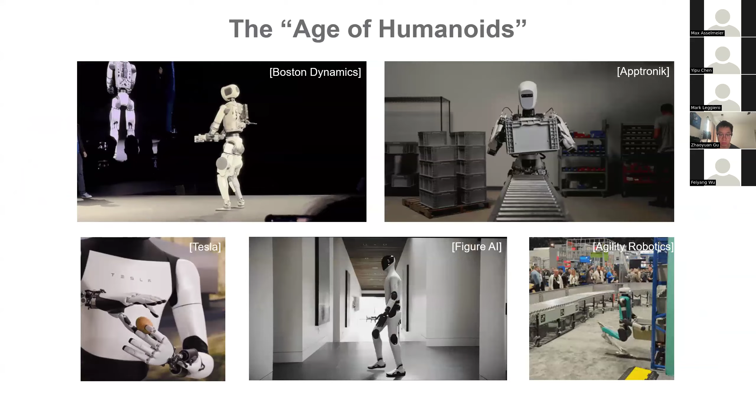So it's driving the industry to consider more automated options, such as humanoid robots in general. Many people now call it the day or the age of humanoids, not only because of the hype, but also because the hardware and embodied intelligence is converging to a point where humanoid may just make sense. It's always been like the final fantasy for human beings, to create autonomous robots that's similarly shaped and can do similar stuff that we do. But I don't believe the technology is really here yet. I still think humanoid robotics in general has a long way to go, both in the research arena and in exploring the true market where it belongs.

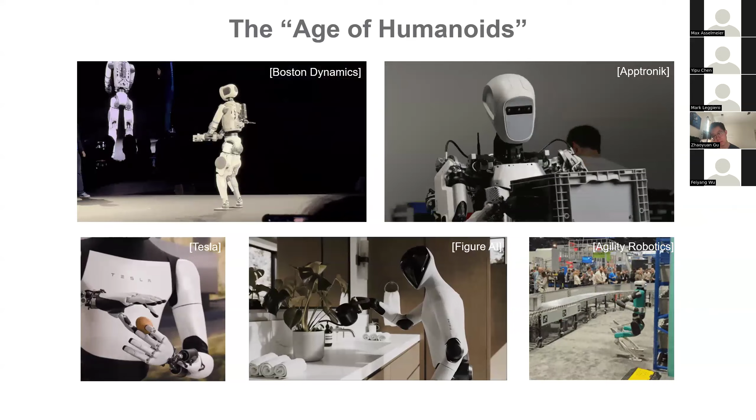So I'll skip some of these motivations and the long videos of fancy humanoid stuff. I believe you guys here have watched them a couple of times already. So the current stage of challenges I believe we face in humanoid robotic intelligence in general - we see from the big companies and research institutes, it's converging to a point where each entity is pursuing their own humanoid-like foundation models, either for general behaviors, for decision makings, or just for low level controls. Upon examination, we can see these structures are sharing similar stuff here.

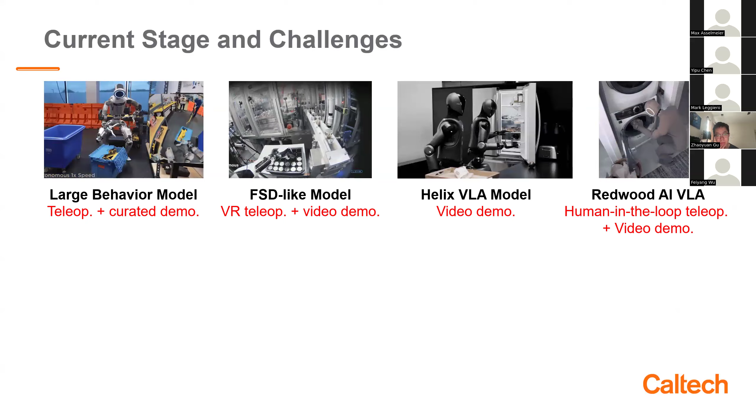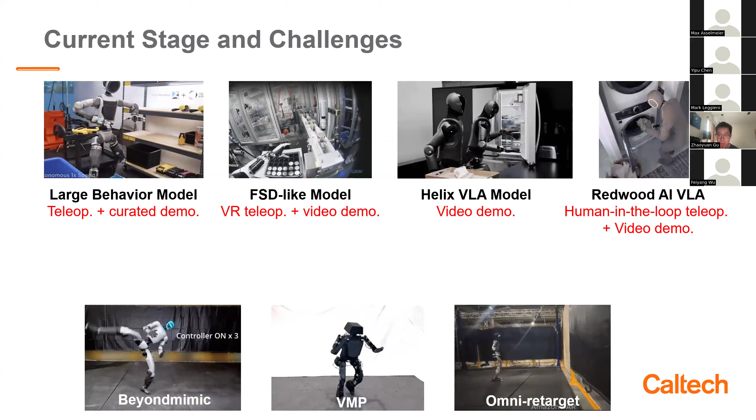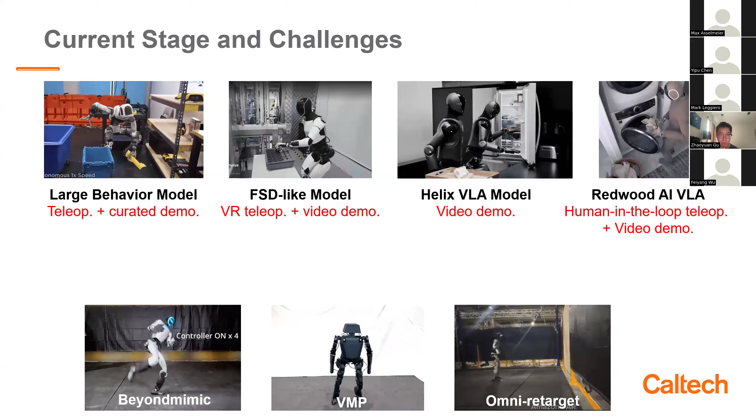So they're all training these models based on some human interventions, either from teleoperations or from human-in-the-loop control. If we look at the research arena as well, some of these research works recently also exhibit similar trends or behaviors, particularly in the motion tracking and learning side, where humanoid is learning human motions - which is funny, because years ago humans danced like robots, now robots dance like humans. Now we see this field converging heavily into demonstration and human data collection. Though very promising as of now, I think it poses some potential challenges down the road that we may not see right away. I hope this does not upset any of you, because I think many of you come from a similar background as I am, and hopefully it's safe to talk about this here.

This is a famous example of the Tesla bot foundation model that is similar to the FSD kind of learning pipeline. On the flip side, the FSD was actually trained based on 10 years or more of driving data collection, over 30 petabytes of real world recording of video data of human expert driving.

Now, if we scale this to humanoid robots, it becomes very difficult because there's no deployment of humanoids yet, and hence no real world working data from the factories. Conversely, humanoids need good foundation models or good controllers to perform tasks autonomously. So it becomes kind of like a chicken and egg problem. This forces us to use video demonstrations, retargeting, or even teleoperation to get high quality data with human interventions in the loop. In many cases these are expensive, resource constrained, inefficient, and prone to errors.

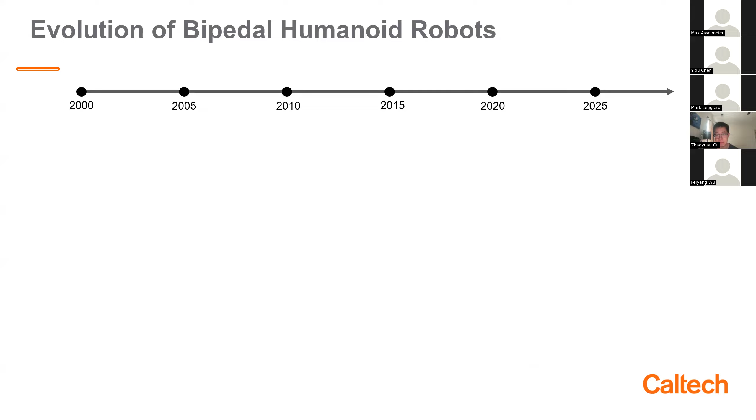If we take a look at the evolution of motion control techniques for humanoids, starting from classic models like LIP, ZMP, through more explicit methods like HZD and more intricate formal modeling strategies like inverse dynamics, operational space control, and then to more recent optimization-based control strategies like whole body control or variants of MPC or hierarchical optimizations, we see steady progress along the way, with each method somewhat built upon the previous one.

So it's kind of nice because everything is connected until we hit the learning arena, namely these motion tracking RL, end-to-end RL. We see there's a little bit of a disconnection from the previous methods we already know. One may argue that policy optimization is just a different scale of numerical optimization, but still it uses methods that are somewhat new, at least to the control side of people.

So we've seen some tries of combining these two arenas together, namely learning augmented MPC, which I believe is a hot topic, and I believe the Ames group is also experiencing some of this right now. My goal here is to try to combine these big circles with all the knowledge we already know, or at least starting from something simple, and use that as a guide to the learning - what we call the model guided learning framework. That's the big picture of how we want to approach this: not completely leveraging learning, but using physics and model guidance in the learning process.

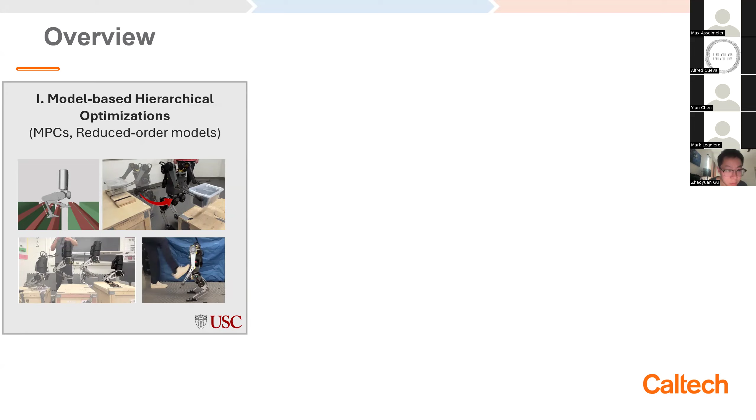And the second section will be my first tries to integrate learning aspects into optimizations, namely using supervised learning in MPC. And the last section will be leveraging these analytical model-based methods during the training of RLs to robustify and diversify the motions and capabilities of humanoids.

Okay, so the first section specifically will focus more on the MPCs and reduced order modeling and how they fit in the whole humanoid control.

Well, this is sort of known knowledge probably for you. It's just some preliminaries around modeling choices for humanoid robot dynamics. I believe many of you already see these figures from Zhao Yuan's survey that we co-authored. So at the highest level of fidelity, whole body dynamics captures pretty much everything: joint states, actuators, external forces, or any of these joint actuations.

And on the other side, we have centroidal dynamics, which is a good representation of the whole body. But at the same time, it represents all the limb inertias and stuff into the COM space, and does not really care about the limb dynamics per se.

And you can further augment this with the kinodynamics models with joint space information, and at the end of this spectrum, we have the single rigid body dynamics, which you'll hear a lot in this talk, at least this part of the talk, which I call the potato model.

So with that, we can already do pretty nice balancing or locomotion, nice turning without getting dizzy, and even uneven terrain locomotion. So this is just a baseline of what we can do.

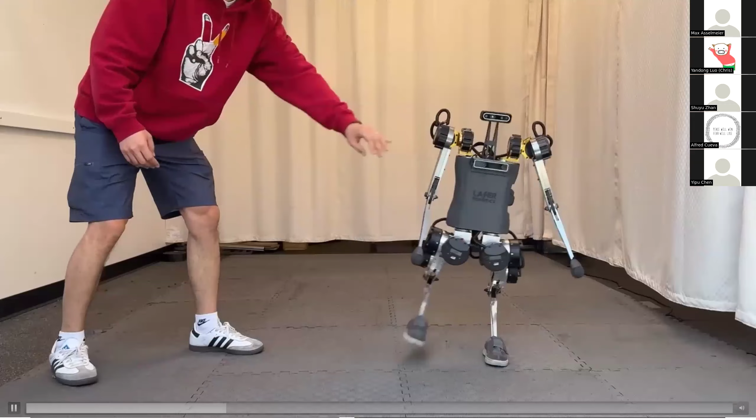But then I found out this: if you push the robot, because it's fixed frequency walking, it will definitely fail, because it just does not adapt its foot placements really well, since we don't really leverage the higher layers of control to plan for any of the foot steppings.

So the next natural step is to also leverage this high level here, having multiple layers of optimization to achieve different dynamic motions. Now, if we modify this and have a nonlinear MPC sitting on top of the high level layer, we can formulate different kinds of tasks to modulate different behaviors of the robot.

Like for example, we can do terrain planning on the high level to do stepping stone traversal, and do trajectory optimization online to achieve these nice jumps, or do push recovery predictions for robust locomotion behaviors. So to give you some examples of what the actual implementation looks like.

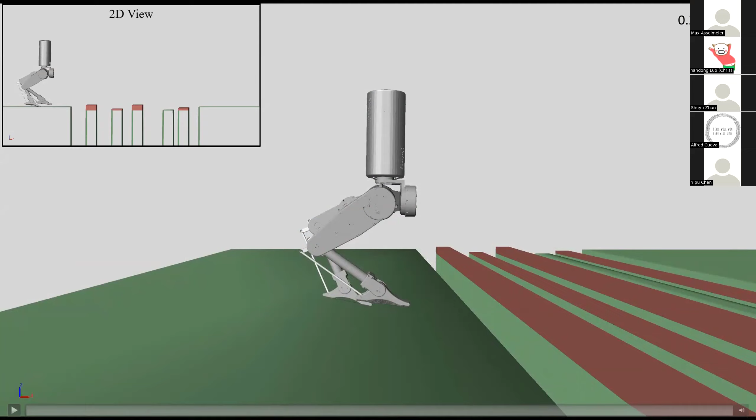We have this nice stepping stone traversal in simulation that can do this really nicely. And we also have some of these jumping online planning and balancing control for the jumps.

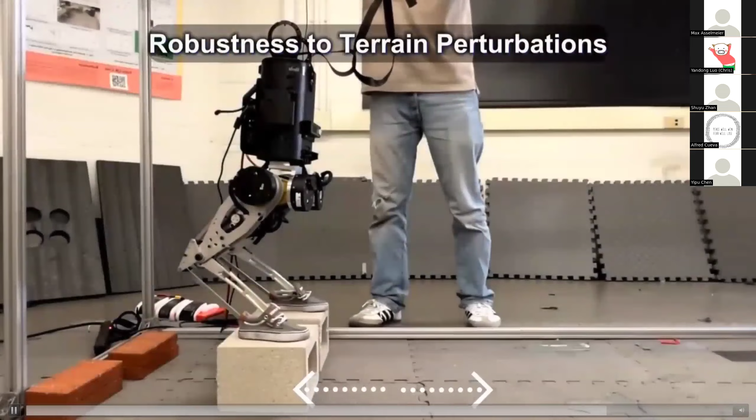Okay, the robot doesn't really know that there is a perturbation to the terrain. And again, the robot is jumping down from the 20 centimeter block without really knowing that the block is there. And also doing some of these autonomous planning and jumping over boxes.

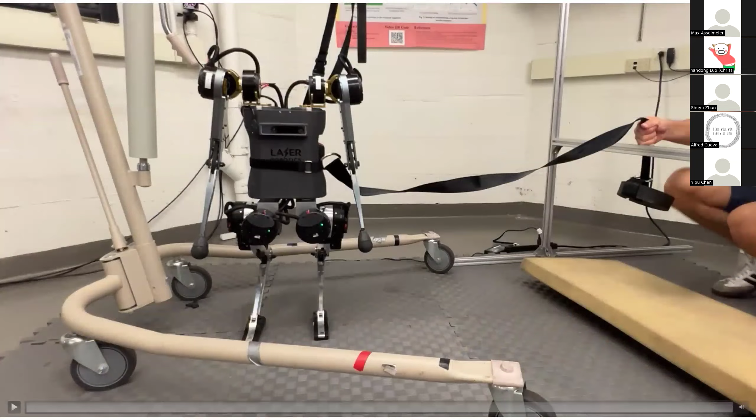And lastly, we have these nice push recovery behaviors that adapt its stepping strategies right here. So you can just kick the robot; it will be able to balance based on the kick and prediction of the COM, and adapts its foot placement and stepping strategies.

So furthermore, if we want to extend this idea to loco-manipulation, especially the case where robots need to handle heavy payloads or move a sizable object, we can modify our reduced order modeling approach to include both the object dynamics and the robot dynamics, and then simplify them into linear forms that can again be thrown into a convex MPC formulation to inform the controller about the masses it needs to manipulate.

So this is an example of the robot carrying a ball first and then throwing it while doing locomotion and balancing all together. This is with the rich information of the contact sequence that informs the MPC.

And also we can do some nice perturbation resistance behaviors in push recovery or in push manipulation. The robot will stay on track even with the push.

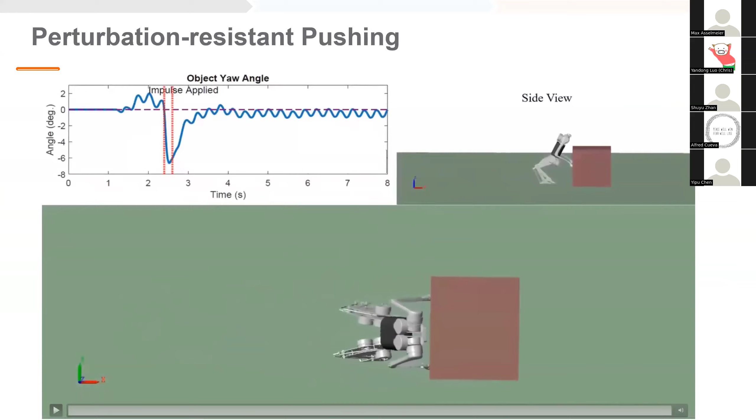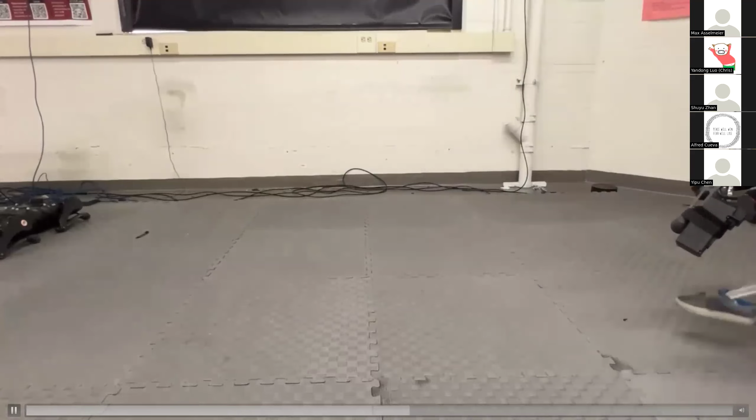And just a few more hardware experiments doing loco-manipulation, carrying different payloads. So maybe one day the robot will be able to carry the groceries for you, and go over rough, uneven terrain while carrying the payload.

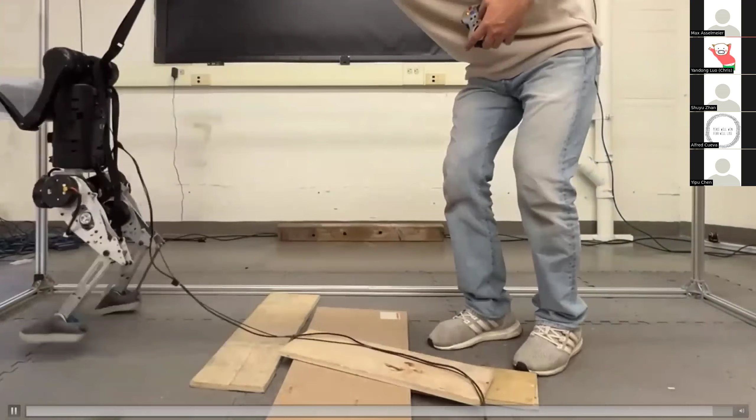So with this, the main takeaways for at least the first section, or the majority of my PhD work, is that reduced order models are very strong, and hierarchies are kind of necessary for different kinds of tasks.

But again, there come the drawbacks of generalization, because you need each task to have a certain amount of manual input to your controller or to your planning level. So it's not really autonomous or generalizable to different kinds of tasks that I want to do. And plus, there's the manual gain tuning and controller brittleness to the model-based strategies.

So in short, there's just so much effort in deployment. You have to do the tuning for deployment, you have to do all the low-level stuff—sensor fusion, state estimation, all of that—which becomes very daunting in practice.

And that motivates me to do the next section of the work, where we try to leverage some of these learning methods, namely supervised learning, to augment MPC and to represent some of these unintuitive aspects that we cannot really represent with this pure model-based method.

And this naturally leads to an ongoing discussion between model-based, optimization-based, and learning-based methods, and how they compare to each other. I like to borrow a memorable analogy from Professor Sam McCabe's talk, where he compares model-based optimization to a well-trained, obedient butler—one that can really follow your every dynamic model or constraint that you give.

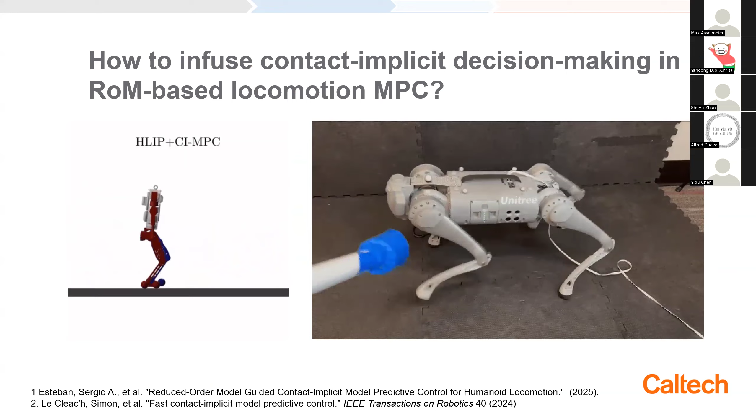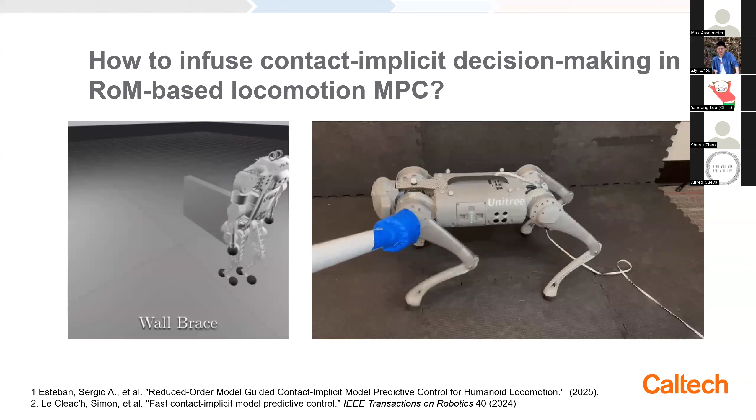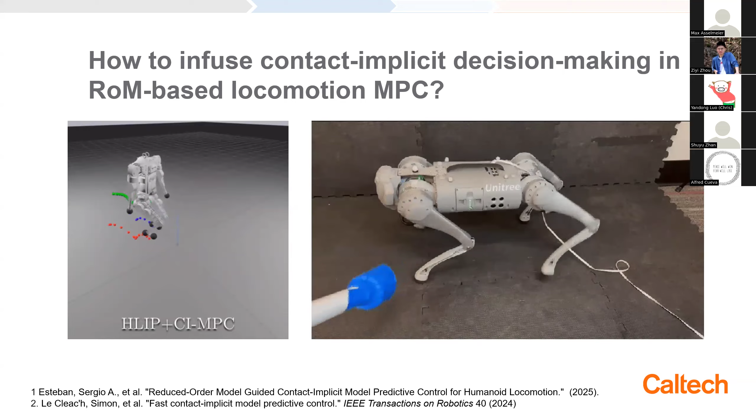The background is also resource-constrained, because a lot of these methods require high-fidelity whole-body models and simulation-level fidelity to be able to simulate and do the contact-implicit planning, which becomes very daunting and very challenging. So what I want to do is leverage some of these learning aspects into MPC, but still use a reduced order modeling that fits within my research arena, to do this kind of contact-implicit planning or decision-making in locomotion.

So what we want to propose here is called the Gait-Net augmented MPC, where we try to infuse a learned policy into the numerical optimization solving mechanism at a deeper level, seeking a deeper integration between the two. So on the framework scale, we still retain a hierarchical optimization fashion, but within the MPC, the hierarchy becomes iterative. We leverage this MPC to solve for the step locations, durations, and contact forces all at once. So in practical walking cases, it will still be periodic walking, but it can reason about stride length, stride timing, and all of that.

The overall idea is we want to leverage what we know about the whole body dynamics model with high fidelity. But with the centroidal dynamics model, it becomes easier to represent and compute online, but it doesn't really have the nice coupling of the step duration or step location behavior, because it simplifies all the leg dynamics and projects them into the COM space.

So what we want to do is leverage this whole body dynamics, which represents the two-step dynamics really well because it has all of the limb inertias and limb actuations in effect in the dynamics model. With this, we can construct a whole body MPC with variable step duration, throw this into simulation, and collect a bunch of different scales of data to relate state information to step durations.

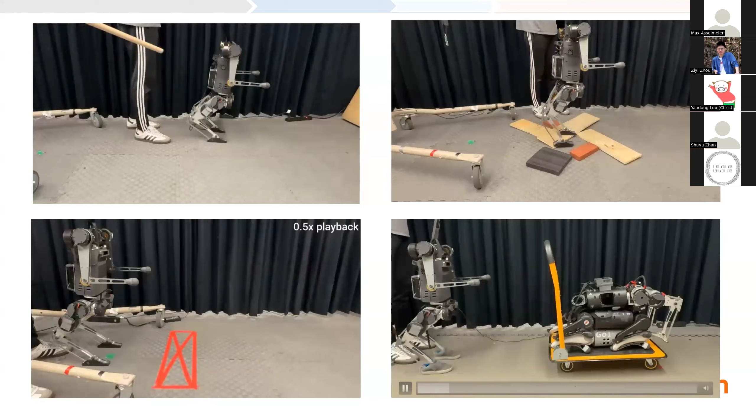Okay, and here are just a few different videos of doing push recovery and different locomotion on uneven terrains, and even with virtual gaps, and even extending this to loco-manipulation with unknown loads that it will be able to adapt to.

However, even though we see some of these nice videos of the Gait-Net MPC, there's still many behind the scenes efforts, especially on the gain tuning side, because now we have multiple controllers to tune, and also a large dimensional space of parameters. So all of that you see is just behind the scenes that we have to manually tune, which is unintuitive for most people, and it becomes an actual task we have to do every time we go into essentially a new terrain or a new behavior.

So this motivates me to do some of this recent work that I'm doing here at Caltech, where we want to really leverage learning to help these model-based methods. One of the works we did recently is learn to tune the control parameters: how to formally investigate the control effect, or the tuning effect, of each model-based controller.

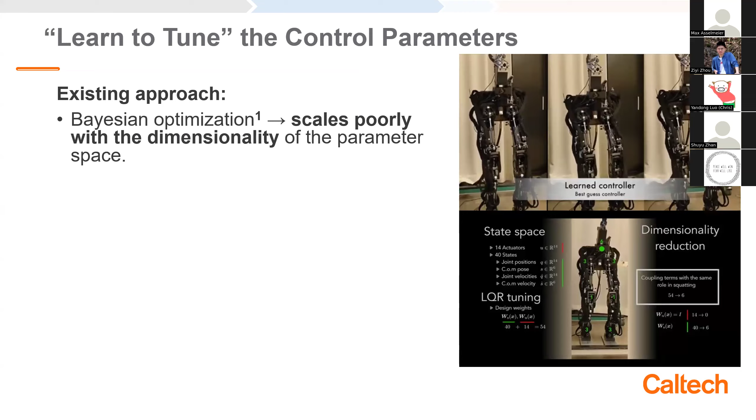So previously, current methods such as Bayesian optimization, you may already know, struggle with scalability as the dimensionality of the parameter space increases in gain tuning. A good example here is in this bipedal robot, they have to really reduce that dimensional space from 54 to 6 for possible deployment on hardware.

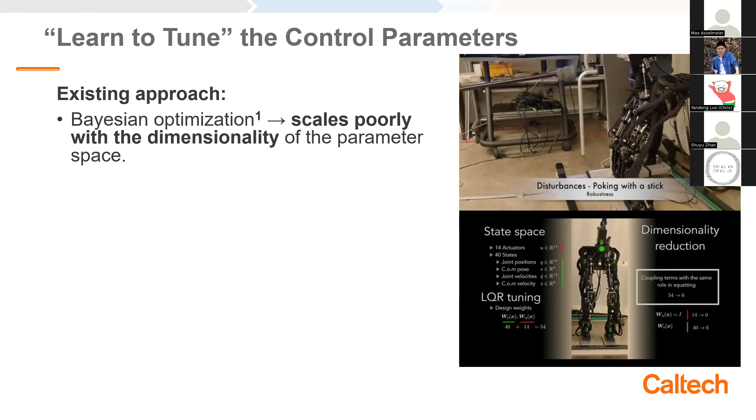So what we introduced was what we call the auto-tuning framework, leveraging DiffTune that the folks at UIUC developed, and it leverages the first order information of the optimization and the controllers to solve for more efficient MPC parameter tuning and learning at the same time.

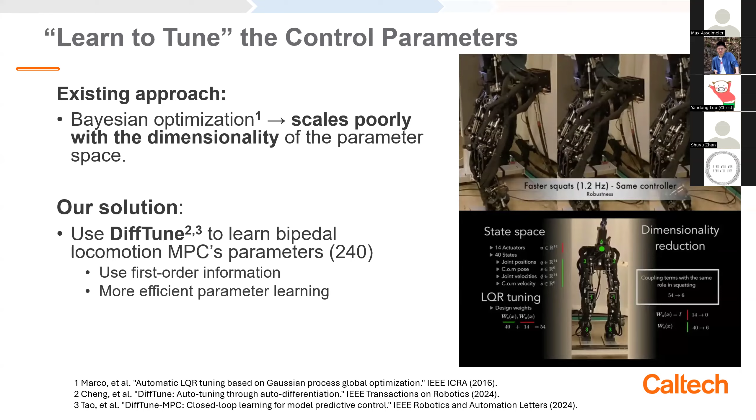We actually were able to do this with a parameter space of 240, comparing to these Bayesian optimizations where they have to really constrain their parameter space in tuning.

So what we want to propose is a ground reaction force and moment network that really leverages the MPC ground reaction force and moment commands alongside the ground truth ground reaction force and moment data that we collected from the simulation. This network captures the discrepancies between the command from MPC and the actual ground reaction force and moment feedback from the simulator, and learns the mapping between the two, right? And this way we can enhance the single rigid body model fidelity, without adding too much computation overhead for the auto tuning or learning process.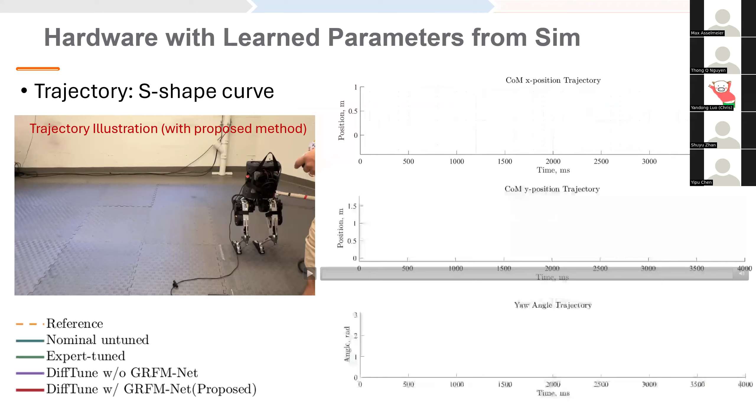So with that, we can actually learn any given trajectories with this associated optimal control weight. This is a zero-shot deployment here, where we learn the optimal control parameters for an S-shaped curve, right? And as you can see, compared to this nominal or untuned method, we can have around 40% of tracking loss reduction here.

Now with this trial, you can probably see the robot is able to follow the desired path and also traverse these uneven terrains, where the nominal controllers with the nominal gains will not be able to do that, right?

So this is pretty much the end of this section. We never really got away, as you can see, from the disadvantages of model-based controllers, right? So all of that low-level stuff and gain tuning we still have to take care of. Even with this nice auto-tuning framework, we see for each trajectory we have to have a separate parameter or setup of parameters, which becomes very challenging or time consuming for generalization.

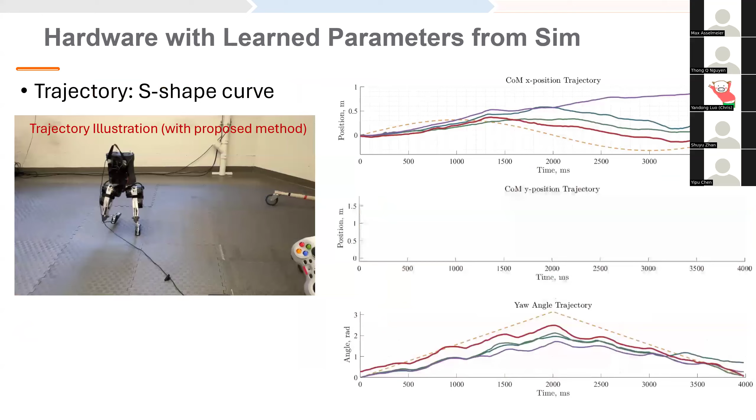Yeah, so this can be any parameters actually you want to represent in the controller space, right? So anything that you can differentiate and get first order information. So here we only do the control weights in the MPC where we formulate the cost function, namely the tracking weights for the trajectories and these minimization weights for the ground reaction force and moments, and also some of these parameters that we can tune, for example, the mass of the robot.

It really depends on how you set up your model and how you set up your trajectories, and it will be able to learn different spectrums of parameters. But honestly, based on our investigations, certain tasks or certain trajectories are only correlated to a certain amount of the parameter space, so it doesn't really need to tune all of those parameters at actual deployment. But we just show here that we tune all of those parameters to show it is possible to have this high dimensional space of parameters that we can tune with this framework.

It's scalable, right? So in case you tune some of the physical parameters or kinematic parameters like the mass, as you said, is this problem sort of like a system identification problem, like you are trying to learn the best parameter maybe matching to reality, I guess?

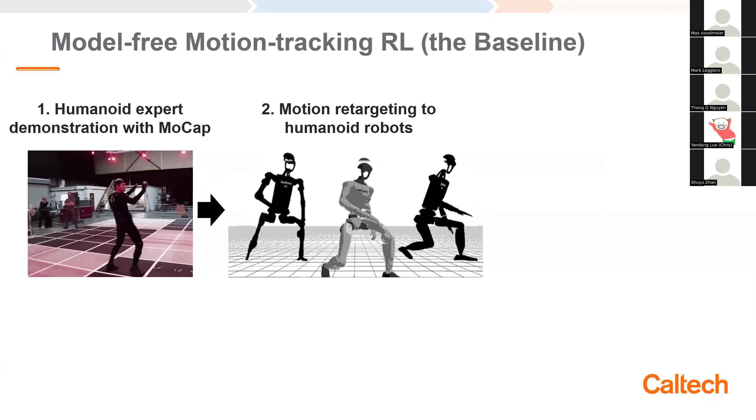I want to first introduce this model-free motion tracking RL that a lot of people are doing nowadays. There are very established literatures and pipelines on this motion tracking RL concept that leverage human expert demonstrations with mocap data or mocap cameras, then retarget this data frame by frame using optimization-based methods to the humanoid action space, and throw these nice trajectories into the RL training loops to get a policy that can do backflips and dancing and stuff.

So you can see all the heavy lifting is done offline, where you have to collect the data and do the retargeting, which are all just for a single motion each time. You can see this is very difficult to do in the loop, or the process in the loop, because it requires human interventions, and the retargeting and data collection is really, really difficult.

Otherwise, you're stuck with distillations if you want to train up different policies and combine them together. But there's always averaging effects between or after the distillation, right?

So what we want to promote is to really leverage the model of the robot that we all know, both the kinematic and dynamic ones, and use analytical derivations of those to generate motions ourselves without the need of human demonstrations, or with very minimal human input. If we could generate these analytical full body motion trajectories online during RL training, it would be possible to infuse this process within the loop and let the robot learn different behaviors, as long as we can provide intuitions of what motions we want to generate during training. So that's how I define model-guided RL in our scope.

This is another example of a long stepping stone course that we did, showing the robot's capability for generalization. We increase the difficulty of the course from width difference to height difference, and also to the narrowness of the stone. Towards the end, we have pretty much an out-of-distribution terrain shapes that the robot just learns by itself.

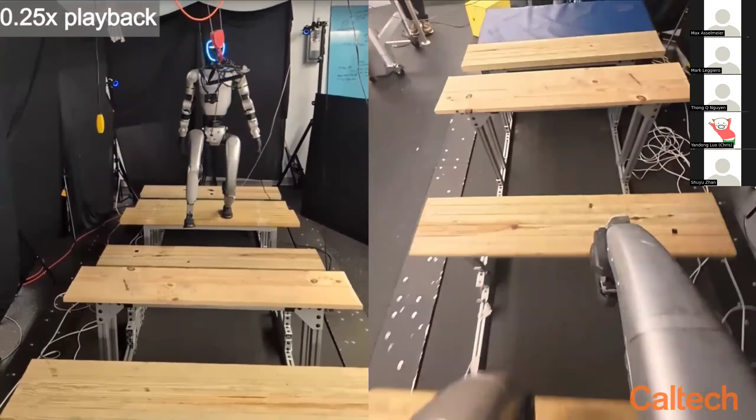On the hardware side, we're able to transfer it very nicely with this walking - you can see the robot stepping on each stepping stone very precisely. The second video shows sparse foothold, where the robot really stretches its leg to cover that stone gap. This is a really cool video recorded with a front-mounted camera, showing the terrain.

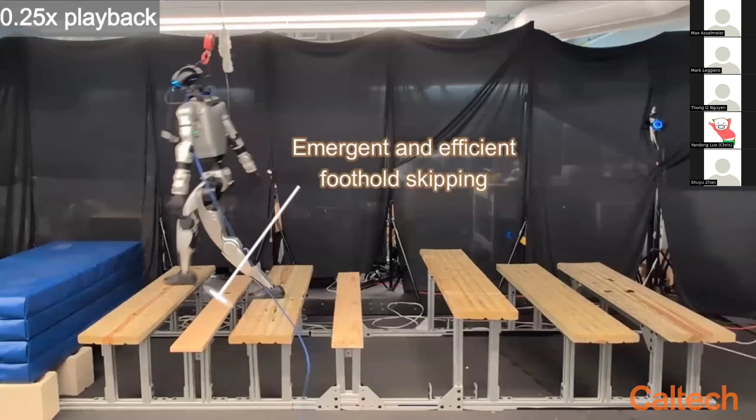Even with narrow stones, the robot can traverse it, and it intelligently decides it can skip one stone to be more efficient, because the momentum is building up and it won't be able to slow down at that point.

So this is really nice, a trial that we did with model-guided RL. Now how do we extend this to more intricate whole body control? With this success, we want to leverage this model guidance for the whole full joint space of control, with some explicit model guidance.

So to give you background on the challenges of current whole body control schemes: optimization-based approaches are really nice in terms of constraint handling, and you can input any sort of dynamics onto it. But there exists excessive parameter tuning and also a heavy layered architecture that we need to build upon, in terms of planning side and also state estimation, sensor fusion, all of that.

But on the model-free RL based side, we have this exceptional behavior with just expert motion tracking. These expert RL policies can do wall flips, dancing really well. But again, it's low sample efficiency - we only learn one policy or one motion per policy, and generalization is still questionable with all of that.

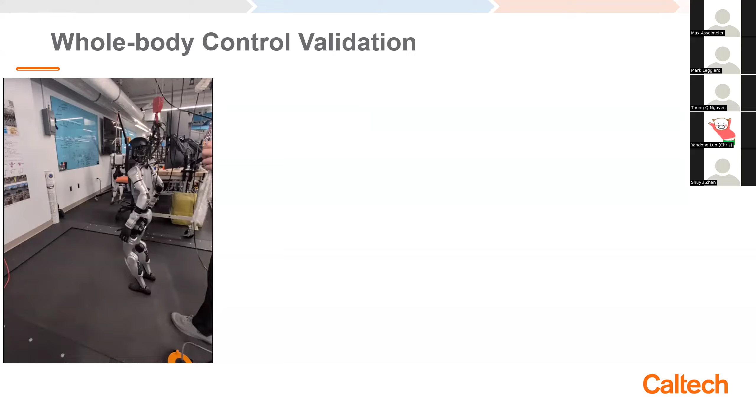Once we did some of these whole body demonstrations within the RL loop, based on random contact points and end effector locations, we generated different motions based on that - there's no human input. We can do whole body control in terms of walking, and even crouch walking with some squatting there.

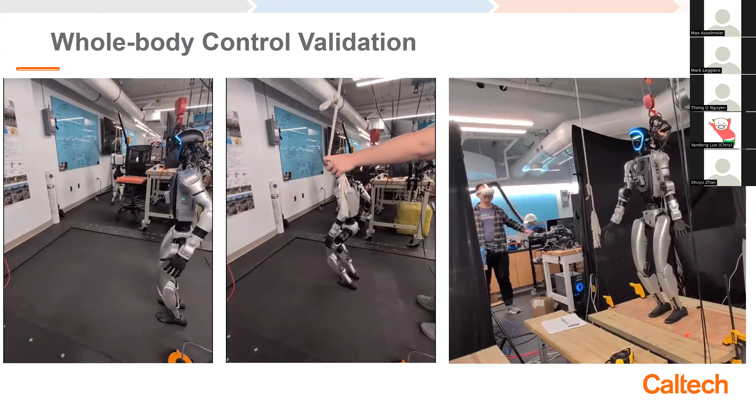Also just doing tele-operations with our own whole body controller, we'll be able to stay in balance with pretty abstract motions. Towards the back here we have, even squatting and doing some pretty fast hand movements.

So I think this work is still ongoing, and we hope to publish or submit to IROS. With that, I think we can do more of these actual applications, extending this to loco-manipulation and some lab work tailored towards different specific applications. I think that's pretty much it for the amount of work I want to share.

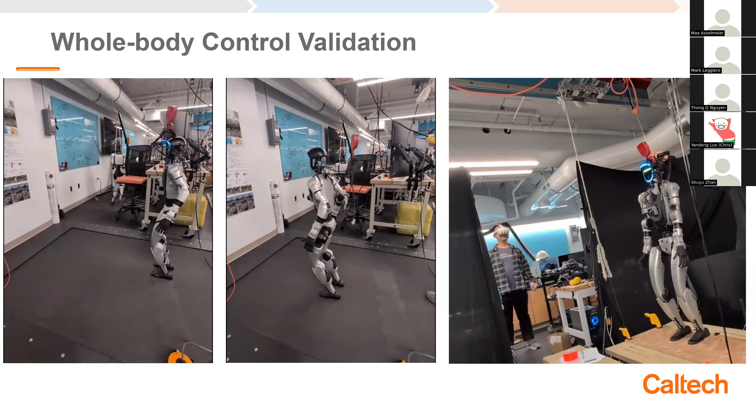But just lastly, I have some other cool stuff that we have been working on at the lab with industry level support.

So this is just having the robot carry a drone and take off from its back. Let's see if this works. Yeah, so this is taking off from the back of the robot. The bending over and bending up is easy.

This is all controlled manually. The hard part is how to do this autonomously, because essentially this is a multimodal planning problem - we have the robot and the drone, different capabilities of walking and flying, the combination of the two, and discrete decision making of detach and attach. So it becomes a huge planning problem. The goal is to do this autonomously, having a planning layer on top of it to do some nice applications in the wild.

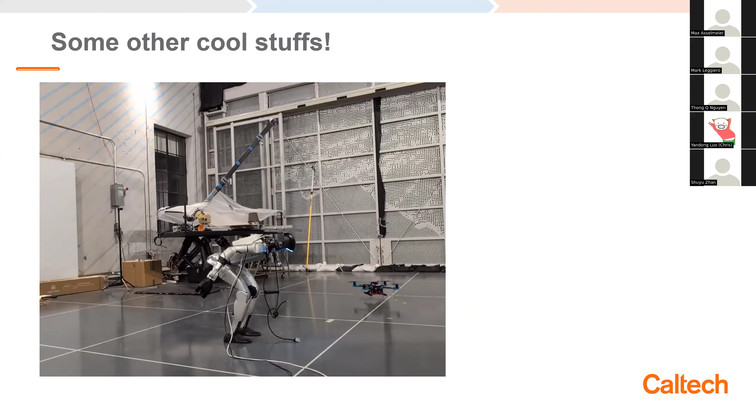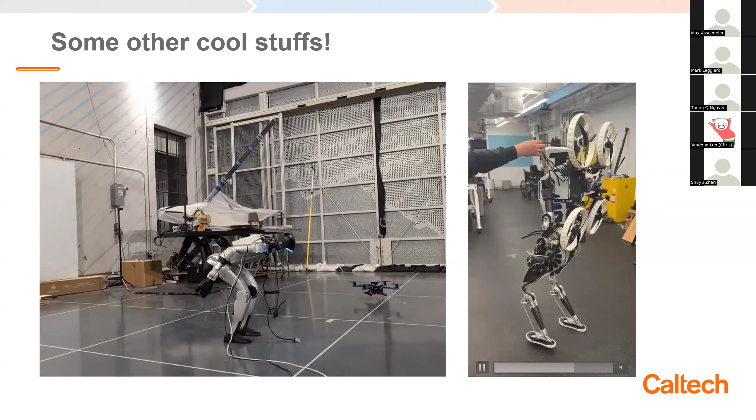And this is another example that we mentioned previously, that Westwood Robotics Themis robot that we just mounted a huge drone on the back of it. It will be able to do the locomotion nicely. And the goal is to have the robot take off the drone and then have the drone do the navigation, and have the robot follow the paths that the drone generates. So it's kind of an ambitious goal that we want to do for the next demo later this year.

Okay, so with that said, I think that's pretty much it for the talk, and just some acknowledgments to all the collaborators and partners and funding sources. And yeah, thank you for listening, and I'll open to any questions.